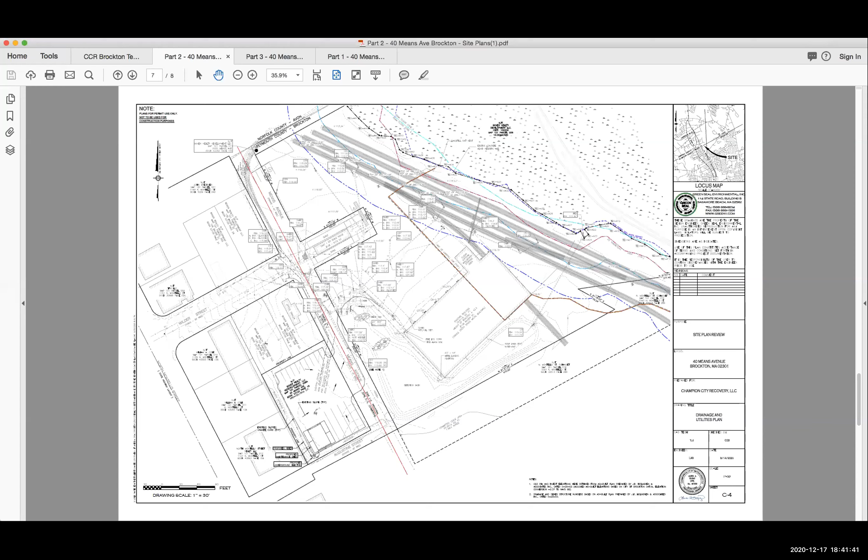Let's see. Is it not sharing? Oh, there it goes. Here it comes. All right. Are you able to see the site plans? I can't see what I'm sharing. Yes, we do. We see page C4, Courtney. Okay, perfect.

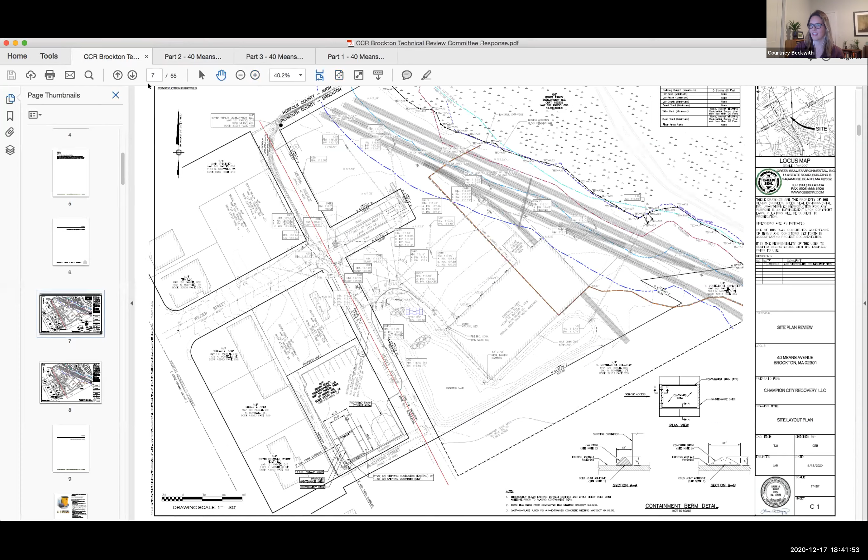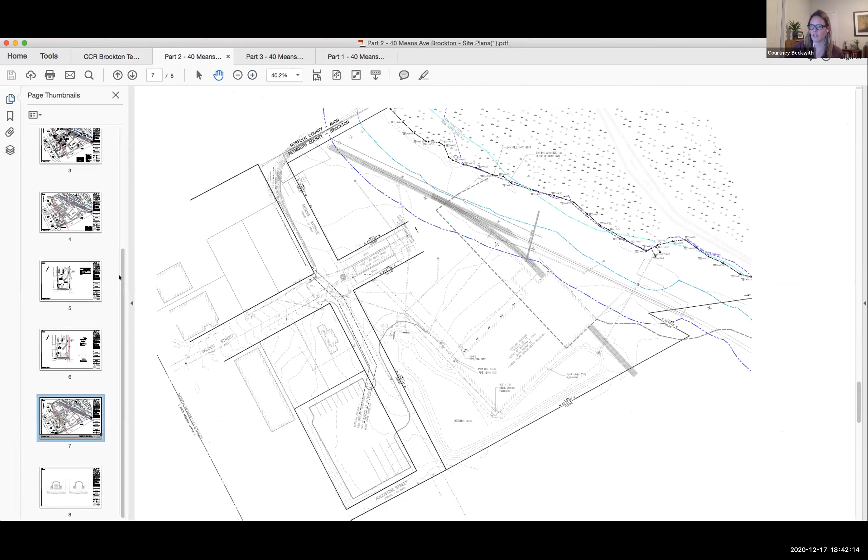So just to further emphasize what I already spoke about, here are the 2 shipping containers back to back on one side, and then there will be 2 more on the other side. And the flex span structure will look something like this, having a steel arch around and then a canvas top, just placed on top of the containers with this rolling door in the front and a man door in the back.

And we are proposing to connect the underground electric from this existing utility pole and revegetate the areas around it. Currently, going from this property across Augustine Street, which is a privately owned road, there's not much of a vegetated buffer there. So we are proposing including some vegetation just to make it look nicer. We don't believe we need much screening because of the industrial nature of the entire area.

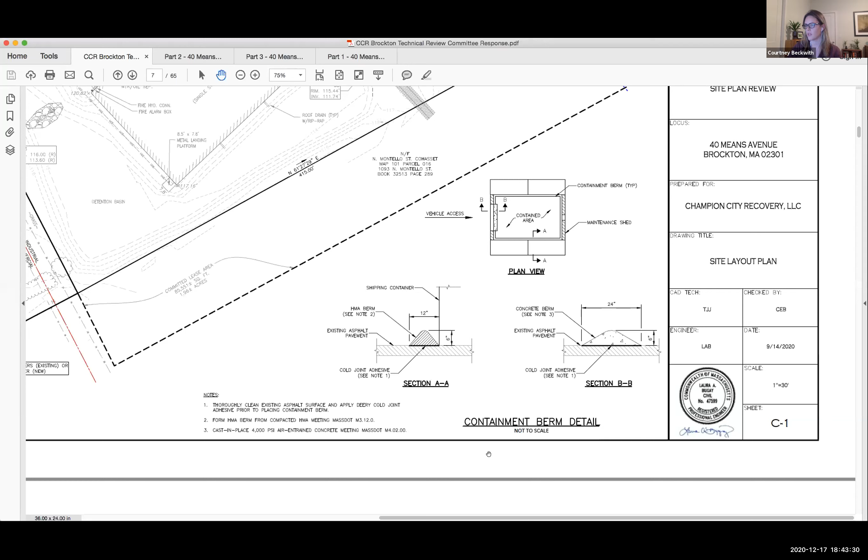And then here's a detail of the containment berm we were talking about. This would be the asphalt section that equipment does not go over. This is the concrete section. And we're proposing to have this on the inside of the storage containers. And I think that might be about it. Are there any questions? I had one question, Courtney.

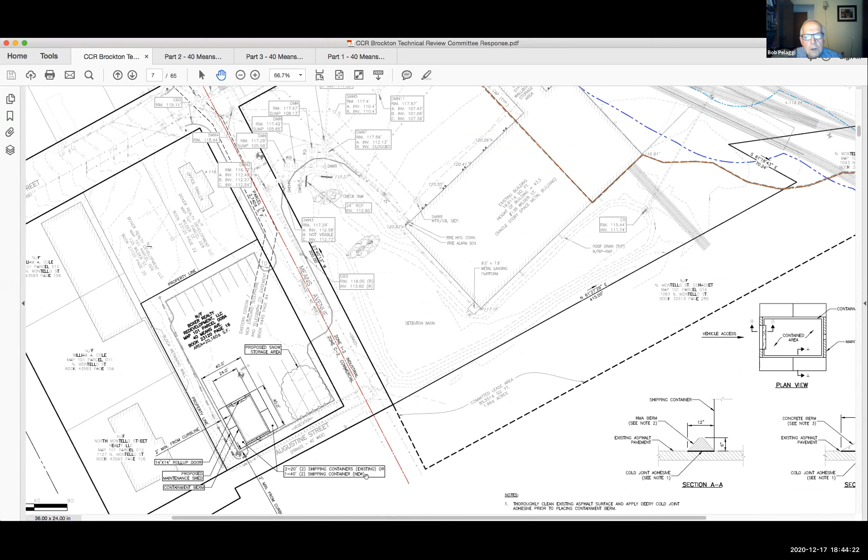I see that you delineated the wetlands there. Did this require an environmental filing? It did not. So we are far outside the buffer. These wetland delineations are left over from work at the transfer station, which did require wetland filing. But as we're across the street... Yeah, you're ways away from that. So you didn't most recently redelineate the wetlands. Did you use the old lines from Holmgren's submission? We did use the old lines. I don't believe these are from Holmgren's submission.

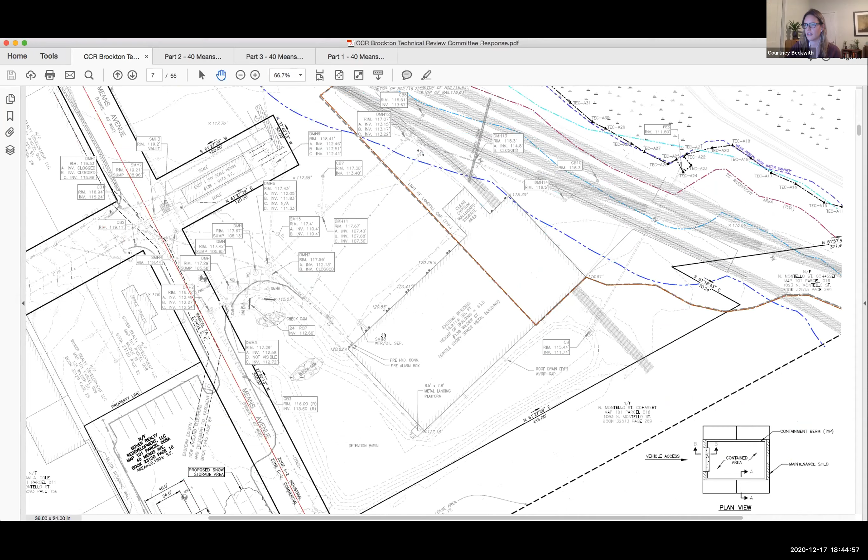Let's see if I have the name of who did this. We have done some extra work on this area as a firm. So I believe these are from a more recent delineation. Okay. But I can confirm that. But your activity is well outside the enforcement area anyway. Yes. Okay, board members, any other questions?

So Pam, were there any other unaddressed issues on the part of tech review? I didn't attend that tech review meeting, but I assume all the other tech review comments have been satisfied. Yes, there were actually very few, because of the nature of the project. And just so you're aware, the conservation agent did review everything, as well as the delineation that showed on the plan. Okay, that's good.

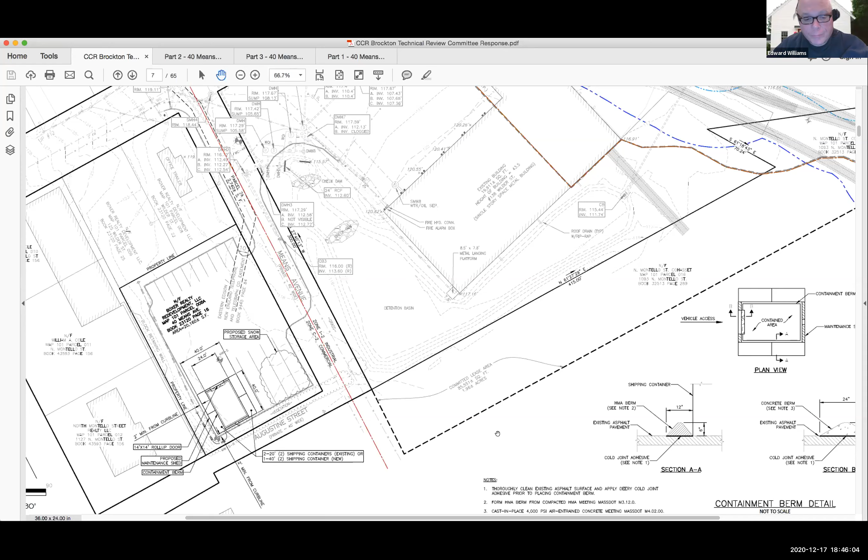Okay, so at this time, being a public hearing, if there's any members of the public that wish to be heard, are you seeing anybody, either Pam or Rob, that wishes to make a comment? Mr. Chairman, may I ask a question? Yes, sir. Just a point of clarification. Is this building going to be for storage or for maintenance or both? So this building is going to be for maintenance. There may be some storage of equipment that would be used for maintenance. But there would be no storage of any heavy machinery.

How about storage of volatile or petroleum items or things like that? No, they won't be refueling in here. This would be more for mechanical repairs. Okay, thank you. All right. Well, if there's no other comments on the part of the board, and if there's no one from the public that wishes to speak, I believe we're in good order to go to a motion.

Motion to grant? Second. Okay. Roll call vote. Larry Hassan, yes. Reggie Thomas, yes. Craig Pina, yes. And Bob Pelaggi is a yes. So that item is approved.

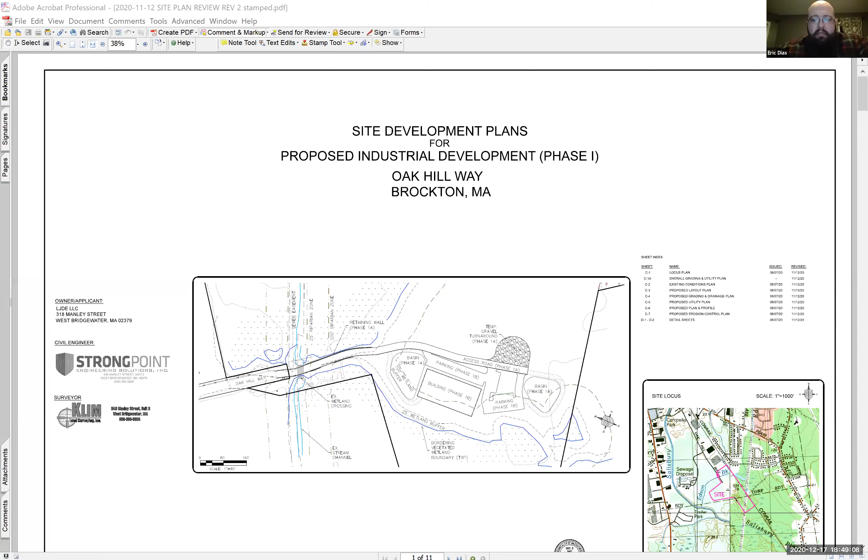Okay, great. For the record, Eric Dias, registered professional engineer with StrongPoint Engineering Solutions, here tonight representing LJDE LLC for the property at 0 Oak Hill Way. Just by way of orientation to start out with, take Oak Hill Way, follow it all the way to the end. You will pass the UPS depot on your left-hand side, and then you will run smack into a fence on the property. The property is actually bisected. Well, I don't want to say bisected, but a portion of the property, at least back in the southerly corner here, is in West Bridgewater, and there is a power line utility easement that runs through a small portion in Brockton and in West Bridgewater.

There are wetland resource areas on the site. The project is currently under an active order of conditions that is before the Conservation Commission for currently an extension and an amendment that is pending the results of this site plan review process. Currently, the site is a vacant site. It's being used just for outdoor storage of waste management facilities, dumpsters, things of that nature. Everything is well contained within the site. There are no leachable chemicals or toxins or anything like that. We're talking just solid waste materials, dumpsters, things like that. So the site is located in an Industrial 3 district.

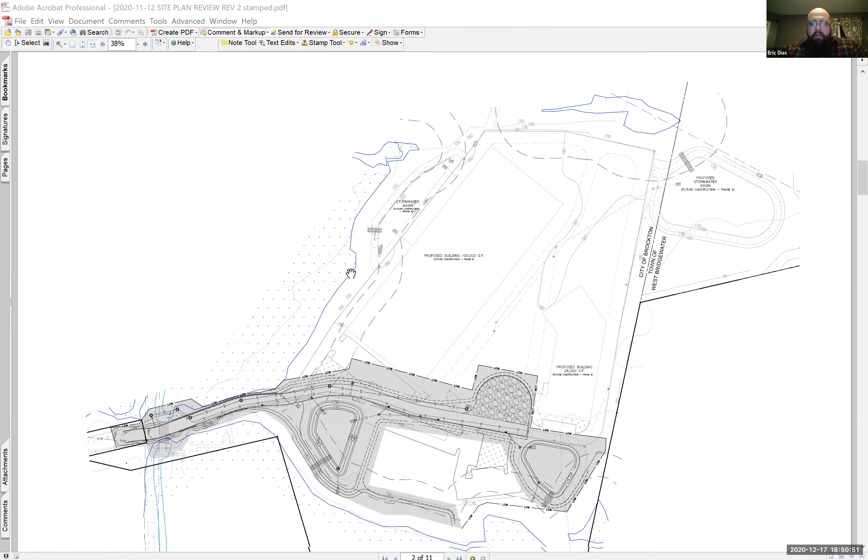I'm going to talk off of this plan because this one shows the main portion of the site the most. We have some ideas for what's going to be developed out on this site. As you can see on this plan, we're showing currently 1, 2, 3 potential buildings on the site. All of those things are a little subject to change as we move through what the needs of the tenant are. But for right now, what we're before the board for is what we're calling phase 1, which is being split up into a phase 1A and a phase 1B. Phase 1A, which is what we intend to build right away, is simply the access drive to the facility. No matter what we do here, we need access to the facility. The dirt gravel road that we have now isn't going to cut it forever.

So what we're proposing to do is jump off the existing pavement on Oak Hill Way. There is an existing wetland crossing, stream crossing in this location here. And there are some sewer and water utilities that run along the stream in this location. We're simply proposing to bring an access driveway into the site as far in as we can. We're proposing a temporary hammerhead turnaround for fire safety at the end of the driveway. That temporary turnaround is going to be constructed of processed gravel base for the roadway now, and eventually will be paved. It's in an area that is earmarked all for pavement down the line, so there won't be any landscaping or anything like that that needs to come out. We have provided a diagram in the plan set here illustrating that it does meet the requirements to have a ladder truck turnaround in that location.

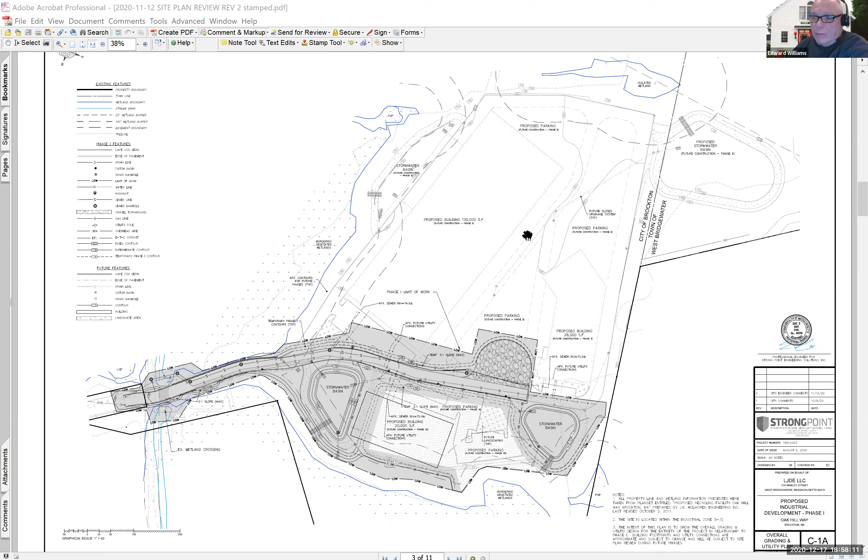All right, this being a public hearing, Pam and or Rob, do you recognize any members of the public that would like to be recognized? Mr. Chairman, could I ask a question? Certainly. Thank you. Eric, how far back is your furthest back hydrant on the plan? I'm trying to look at it, but it's kind of small. Yeah, let me zoom in here. I can find a better sheet that will show us better. It's our grading and drainage sheet. I think we have a proposed utility sheet that will show hydrants a little bit better than this here.

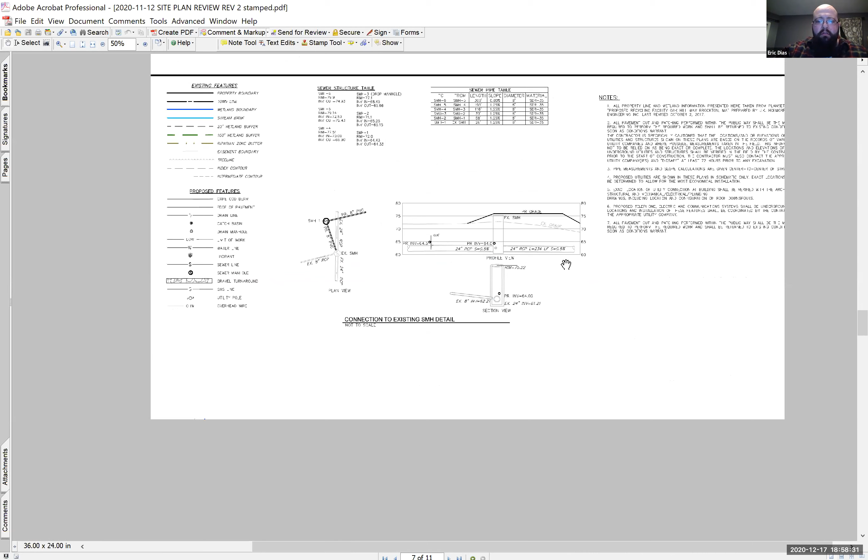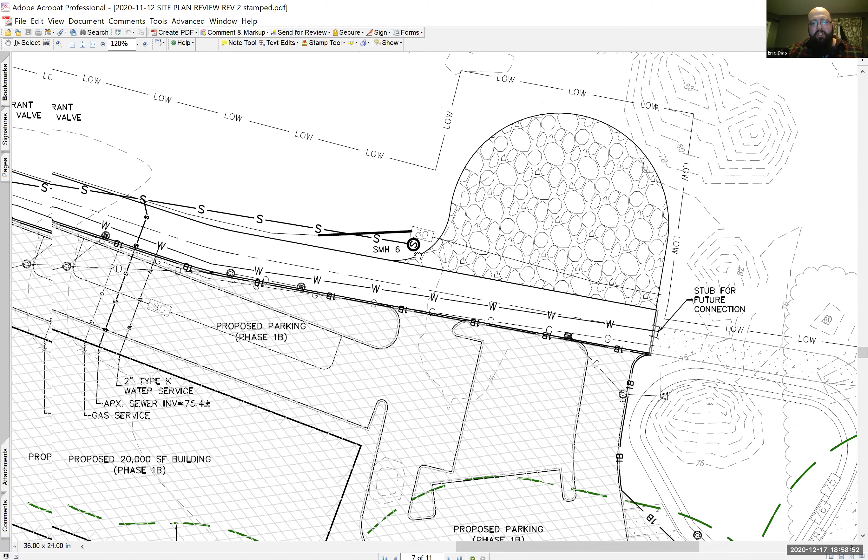We are showing a proposed hydrant right in this location here. Our turnaround is at the end of the proposed roadway here. So we're showing a hydrant approximately, I'd say 150 or so feet from there. If I go to my profile sheet, I can get us some better stationing.

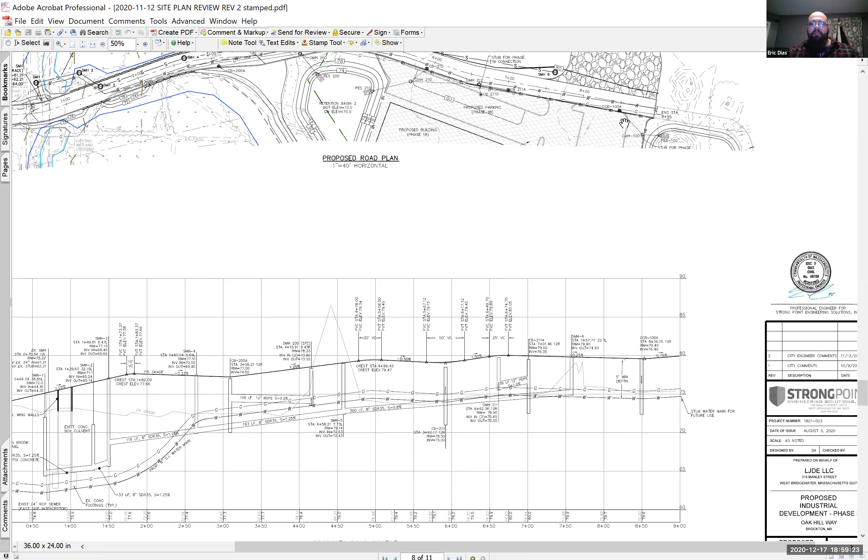I've got a hydrant at approximately station 500, and I've got this ending at approximately station 800. You're at 900. Yeah, we're at 900. So about halfway down the proposed roadway is our closest hydrant at this point. Okay. Larry usually likes to have a hydrant at the end of the line for flushing purposes and stuff like that, if you could do that.

And who knew, we put a whole bunch of fire trucks out there and a lot of water out there too. So the possibilities are endless. Yeah, in fact, our water main does extend all the way down to the end of the road, so I don't think it really hurts us to drop a hydrant there out of the way somewhere.

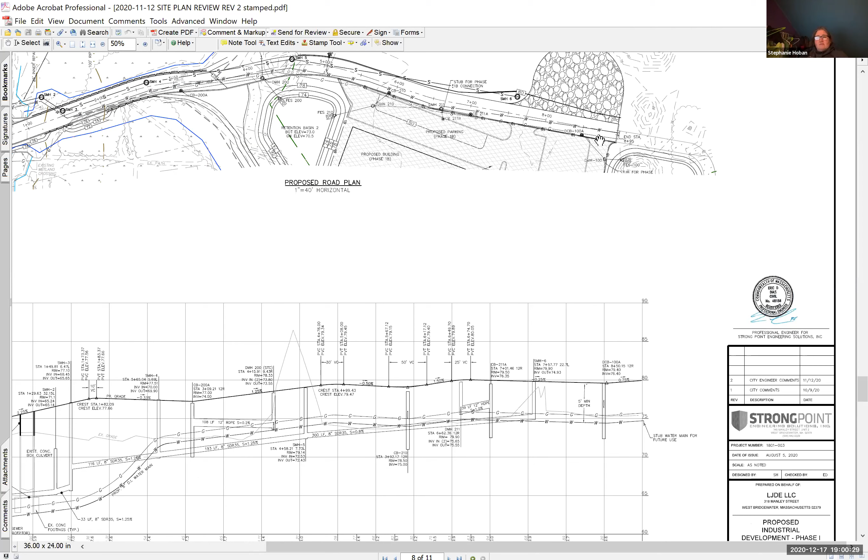Okay. This is Stephanie from StrongPoint. I believe we are proposing a hydrant at the end of this road for phase 2, because right now, where our water line ends and we stub it, there's going to be more pavement in another building, possibly in the future. Stephanie, for clarity, you're saying that you plan to extend the paving beyond station 900? Not during this phase, but in the future, yes.

Okay. I believe if we look at the full planning build out, pavement will actually extend to the side of the basin. Yeah, pavement does in future phases extend a little bit more, but I think what we can do as a part of phase 1 is, any hydrant that we were anticipating putting in phase 2 at the end of this pavement, I think we can cut that in now as a part of phase 1 and get that on these plans.

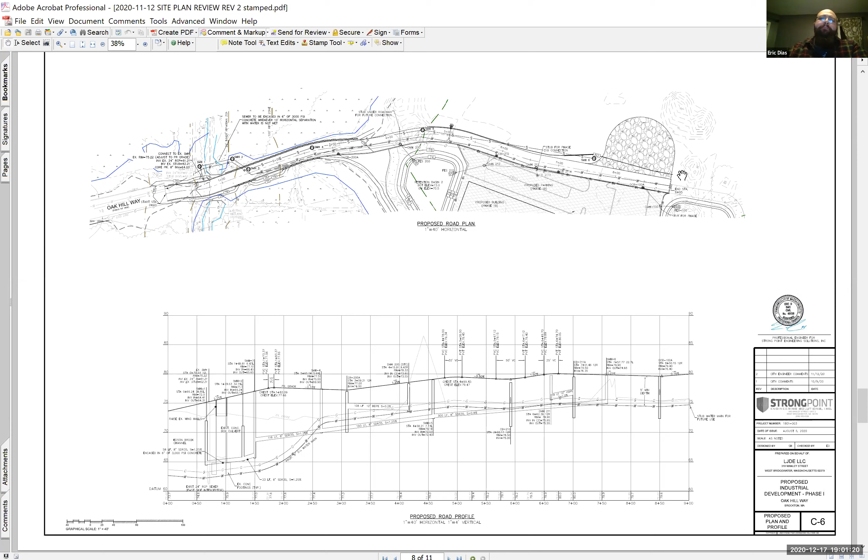And actually, if you go much further, you're in the town of West Bridgewater, and they have a totally different hydrant than we do for access. We use totally different threads and connections, so they'd probably want their own hydrant. Sure. Not a problem. We can certainly add that, and if we could do that as a condition of approval, we would certainly appreciate that. Now, Eric, the side of the roads, are they going to be granite curb?

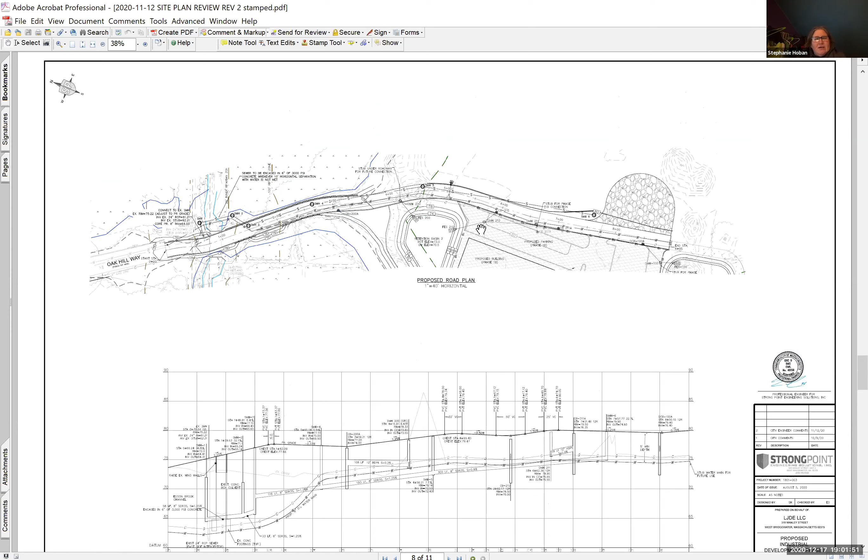No, I believe, and Stephanie, correct me if I'm wrong, we're proposing bituminous curb here, is that right? That is correct. Yep, bituminous curbing. We might have a little bit of curbing along the crossing. Yeah, along where we have the wetland crossing here, I think we have a concrete curbing, something just a little bit more substantial. But outside of that crossing in the wetland buffer zone areas, we're only proposing a bituminous curb through here.

Eric, what is the width of the proposed paving? Width of the proposed paving is 24-foot pavement width from gutter to gutter. That's correct. And what is the diameter of your temporary turnaround? I can zoom in on that. I know you're not under the subdivision rules and regulations, but to meet the turnaround for the emergency equipment, I think it's 120 feet.

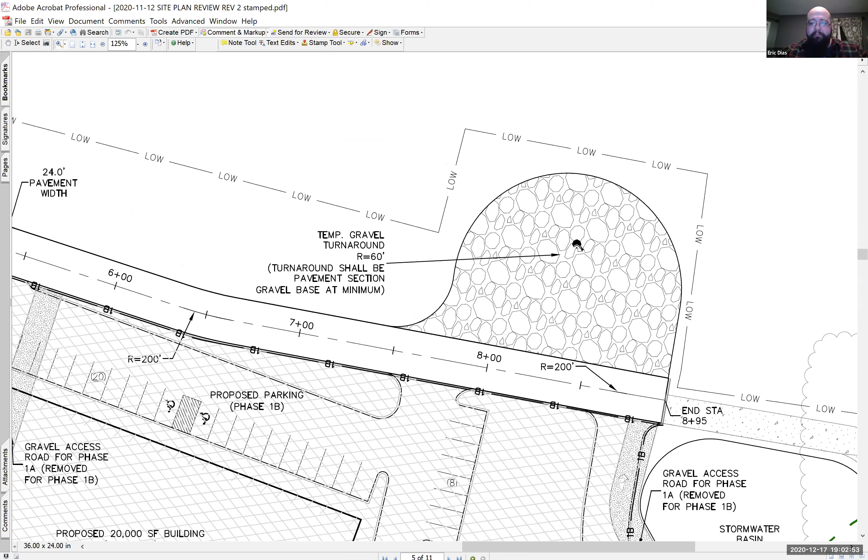And that's what we held. We gave a radius of 60 foot, so we have a diameter of 120. Just to make sure, even though we're not under subdivision control, we figured that was the standard. Eventually, this is going to be a bit of a sea of pavement anyway, so we had the room to do it. I like it. Very good. There it is right here. I'm sorry, I didn't even see it. Radius of 60.

Thank you. So Eric, will there be a driveway opening, if you will, that will lead to the back portion where we have the piles of mulch or recycling? Along this side here, you mean? Yes. I think along this side here, probably no curbing for the time being. Everything is sheeting toward the detention basins anyway, so we don't need it for stormwater management. If we put a curb along that side, it's just going to get beat up and run over by trucks for now.

I think curbing will go in along that side when a phase 1B comes through, when we do have some more defined traffic islands and things like that. Okay, thank you. Yes, sir. Very good. Any other comments on the part of the board?

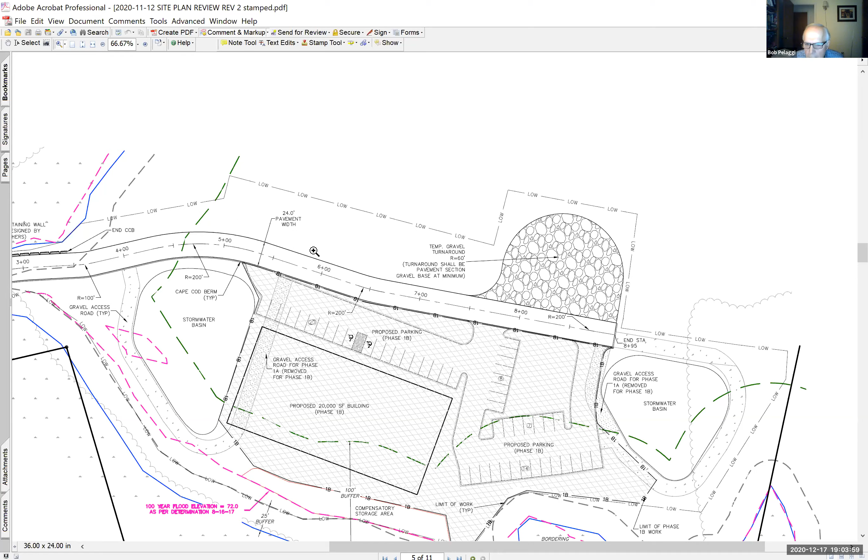All right. Well, this being a public hearing, are you recognizing anyone else, either Pam and or Rob, from the public that wishes to speak? I believe the ward councilor wanted to speak. Good evening. Is the ward councilor, would this be Councilor Nicastro? Oh, it really would. Good evening, Councilor Nicastro. Good evening. Thank you very much. Good evening to all of you. Susan Nicastro, Ward 4 Councilor. I live at 90 Samuel Avenue, very snowy tonight.

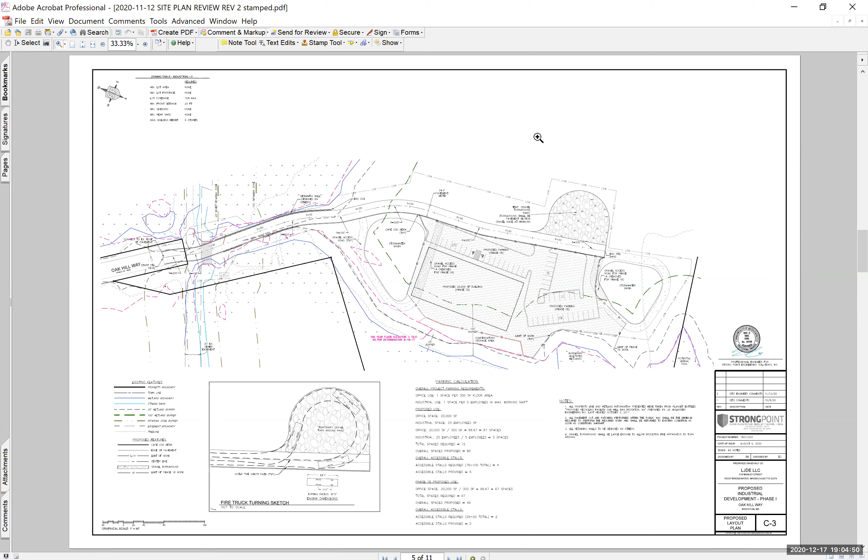I am very interested in what's happening here. I was very pleased when Mr. Levy and Mr. Tarantino purchased the property. I've had a rough time with the activities at this property over the summer, starting in April and continuing till as recently as the Saturday after Thanksgiving, because they've been experimenting in composting. And we've all learned the hard way just how smelly composting is for the abutting Ward 4 neighborhoods. So the engineer characterized it as just vacant and nothing going on there, but in fact, there has been quite a bit going on there.

And it has caused a lot of concerns, problems and strife for Ward 4 residents. I want to get that onto the record. And also, I wanted to ask what is going to happen with the composting, and when will that go away, and the odor that goes with it on warmer days. Mr. Dias, do you know the approximate location of that activity on the site? I believe that the composting is back in this portion of the site, actually in the West Bridgewater portion, if I'm not mistaken. So it is quite a way removed from what we're proposing for phase 1A.

To be 100% honest, I apologize for not calling out the composting in my presentation. I should have done that because Ms. Nicastro is right. It is an active use of the site. And that activity was conducted by the prior owner? That activity, my understanding, is being conducted by the current owner. Oh, I'm sorry. I don't know what the future of the composting is. I simply know that it's not anticipated to be affected by what we're proposing for phase 1A at this time. So I believe the composting will remain for the foreseeable future as an independent matter or use elsewhere on the site. I know that the owners have certainly fielded some concerns about the composting, and my understanding is that they've responded pretty well and continue to do so.

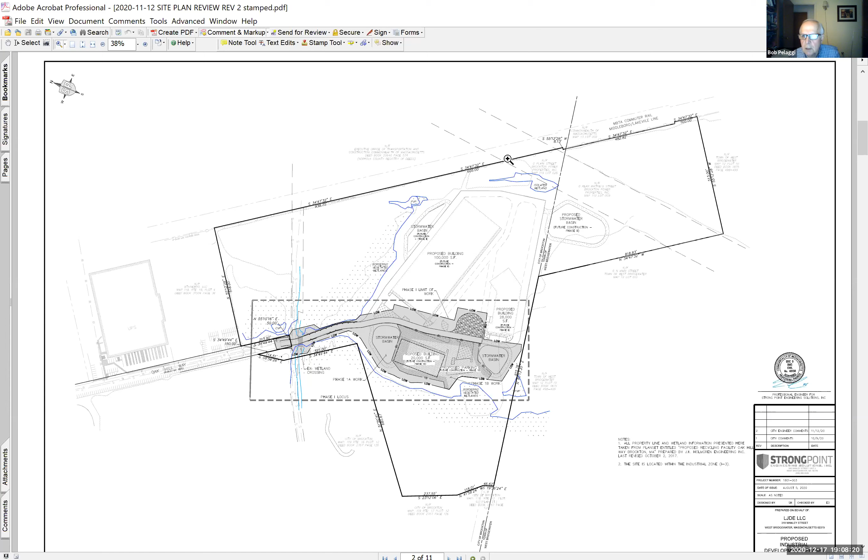Thank you. Understood. Thank you, ma'am. All right. Thank you, Councilor. Okay. Were there any other members of the public that wish to be heard? There is nobody in the waiting room. All right. Very good. And again, Pam, there were no other concerns on the part of the check review that needed addressing? Everything was taken care of? No, he is correct. He had multiple meetings with the city engineer to go over this, and this is the outcome of those meetings. And check review. Yes. Okay.

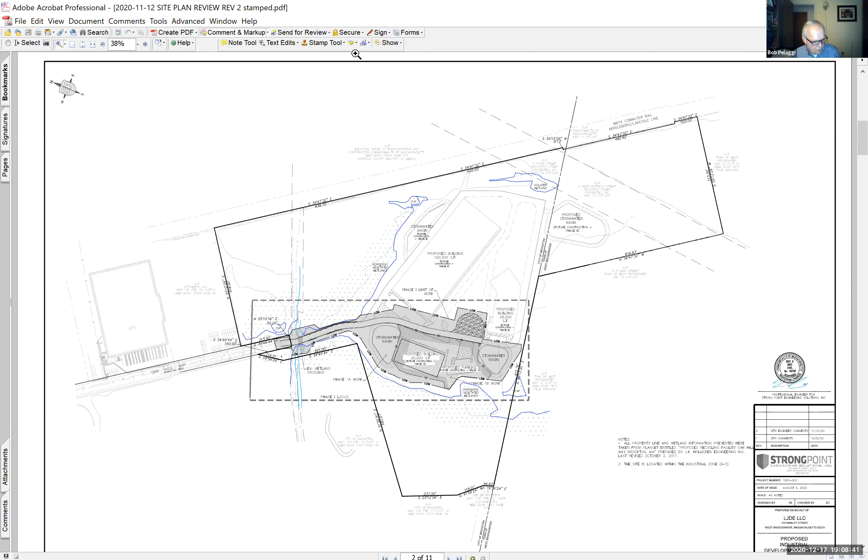Well, without further ado, if there's no other issues or comments, would a board member care to make a motion? I'd make a motion to approve on the condition that the hydrants are added as Chief Williams suggested. You're approving 1A only? Yes. Phase 1A. I'll second that motion. So we do have a motion and a second. Roll call vote at this time. Larry Hassan? Yes. Tony, were you on for the whole presentation? Yes. Okay, so how do you vote on this? Yes. Reggie Thomas? Yes. Craig Pina? Yes. And Bob Pelaggi is a yes. So voted. Great. Well, thank you all for your time. We certainly appreciate it. Thank you, and have a great evening.

Okay, so were there any other items or housekeeping items or anything else, Pam and or Rob? There is not. Wonderful. Then I guess I would be in good form to ask for a motion to adjourn. I'll make a motion to adjourn. A second.